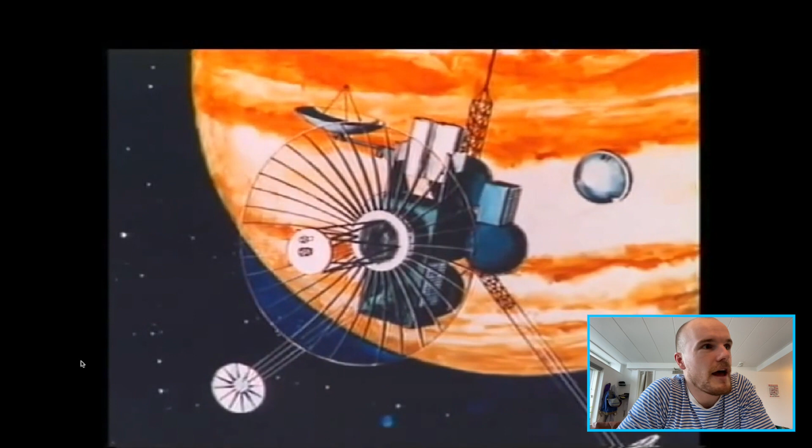So yeah, this is the Galileo space probe, and it's an artist's rendition of what the mission looked like. So this was basically a spacecraft that they sent to Jupiter, and then from the main spacecraft they dropped this thing, which is an atmospheric probe. And what you can see happening here is the probe entering the atmosphere at 47 kilometers a second. And it gets really, really hot, as you can probably imagine. And just how hot it gets is really the question. That's really the subject of my PhD.

So you can see here, this is after it's gone through the high heating entry phase. It drops that parachute and then drifts through the atmosphere, and then this thing collects heaps of data about the atmosphere, what's the composition of the stuff there, how fast is the wind going, what's the temperature, and then it sends this stuff back up to the main spacecraft, which is still in orbit, and then that spacecraft sends it all the way back to Earth. And that's the point. That's the whole idea, is to get data about what's going on under the surface.

Yeah, I like this video because it's just a really cool art style as well. You don't see this much anymore. It's usually just really complicated computer simulations, whereas back in the day, you'd get a lot of really cool hand-drawn aerospace engineering stuff, and it's often a lot better.

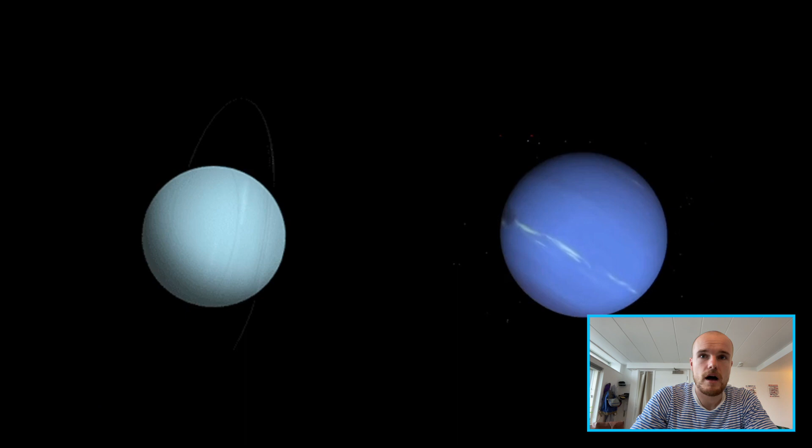So, I am working on something pretty similar, but for the ice giants, and the ice giants are Uranus and Neptune, these two guys. And so the presentation is kind of technical, but it's not too technical. If you're interested in what I'm actually doing, then it's worth listening to, I suppose. So I'll be talking about the specific stuff that I'm doing, in terms of what things we are actually hoping to get out of the tunnel, and the engineering that I'm doing right now.

Presentation structure, who cares? It's lame. You'll work it out. So motivation and background is an engineering term for: what is the point of this whole presentation? Why should we be interested in what you're doing? And it's usually directed at people who fund you.

But it's worthwhile stuff. So the mission is to send a spacecraft to the outer gas planets, like I was talking about, and this is an example of what the spacecraft might look like. Heat shield, and then this is the actual payload, as it's called. This is the science that they're delivering. And they're potentially wanting to do this in the early 2030s, because that would be a time when all the planets align in a nice way that you can kind of hit them both at once.

So T6, the name of the tunnel I work on, the T6 Stalker tunnel, named after a famous hypersonics researcher, Ray Stalker, is the only facility, and facility is a word for wind tunnel, in Europe that's capable of going fast enough. So I mentioned that for Jupiter it's about 47 kilometers a second, but for these ice giants it'll be about 20 kilometers per second. So T6 is the fastest one. It's the only one that can do it in Europe.

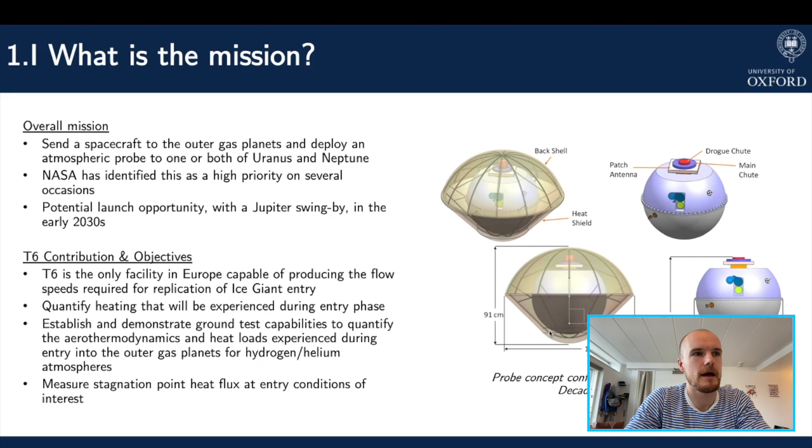And what we're hoping to measure is the stagnation point heat flux, which basically means the heat transfer into the vehicle. How hot does it get? And if we know that, then we can design the vehicle. So that's what the mission is.

Why would you want to do this? This is a good question. A lot of people ask me this. So why would you want to go? It would cost about $2 billion to do this mission and send a spacecraft out into the outer solar system.

And I think, if anyone knows my neighbor Marie, she always asks me these questions like, why would you do that? Why would you spend $2 billion sending a piece of metal out into space to just look at these kind of balls of gas?

Well, other than the fact that it's never been done before, planetary scientists think that Neptune and Uranus are really similar to a lot of extrasolar planets. So these are worlds that orbit around other stars than the sun. And they think that by understanding the structure of these two planets, they might be able to infer information about these extrasolar planets, and that would give them information about a lot of extrasolar planets.

They have a lot of unusual properties. The magnetosphere is unusual. Another one, kind of like the elevator pitch one, is that there might actually be life on the moons of these planets. So it's not uncommon for the tidal forces of gravity to heat up the cores of these tiny little moons.

So it's a tiny moon next to a really big planet, and tidal forces, which is basically the giant planet pulling, so the moon pulls the tide up on the Earth a couple of meters, and the moon's just a tiny little moon, but imagine you've got a massive planet like Neptune pulling on a tiny, tiny little moon, so it will squish like this,

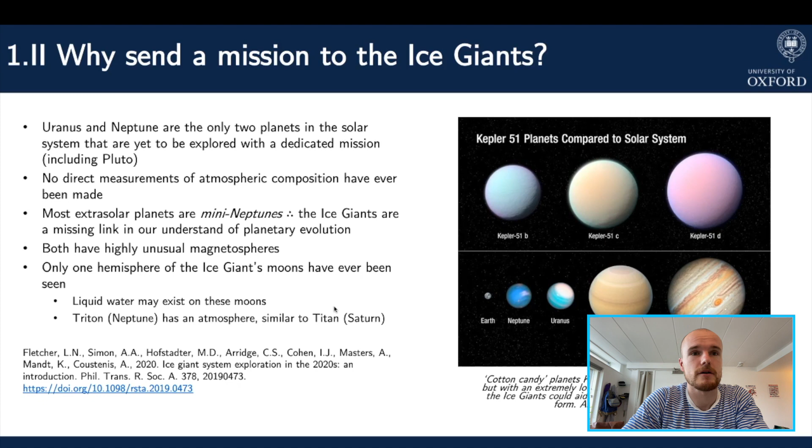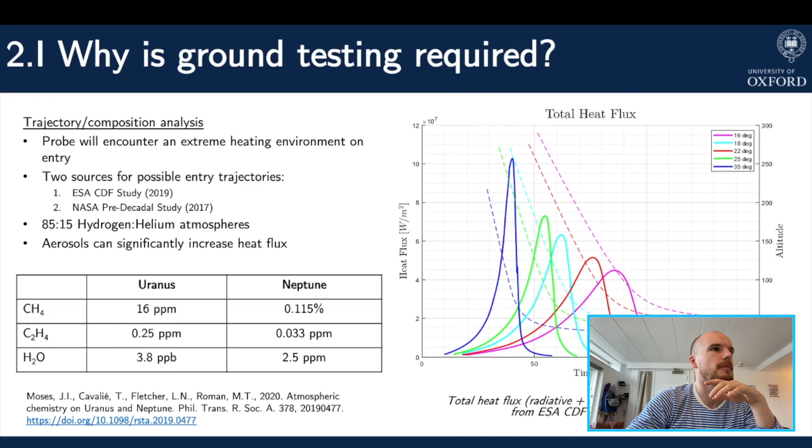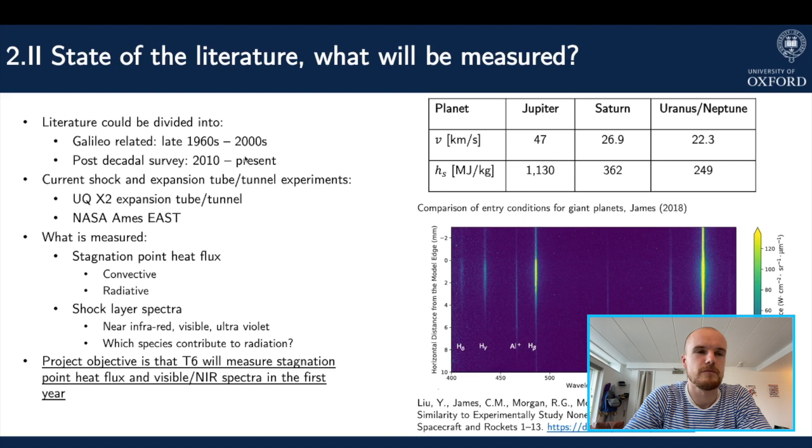They do experiments on this kind of thing at the University of Queensland, so shout out if you're from Queensland, and at NASA Ames in California. So they're the two main places where they do experiments similar to what we are doing, or planning to. Planned upgrades and tests. This is what I'm actually working on.

So I'm designing a lot of stuff. I'm actually not doing that many tests at the moment. We need to make a lot of upgrades to the tunnel T6 in order to get it to do these tests that we want it to do, because 22 kilometers a second is extremely fast, even for T6.

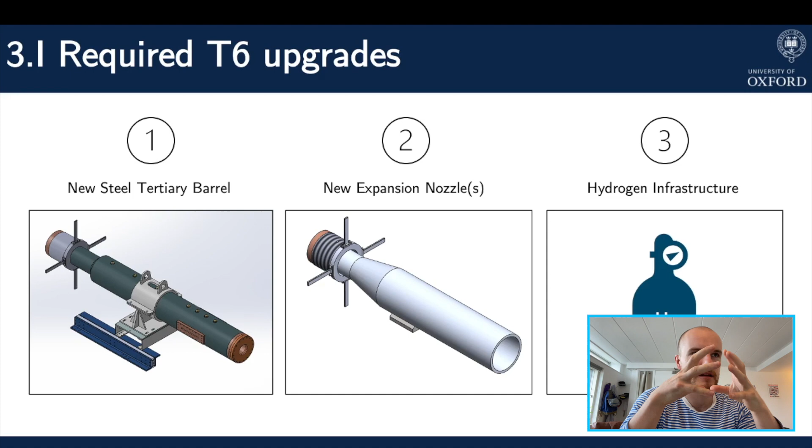So I'm building something called a new tertiary barrel, an expansion nozzle, and all of the hydrogen infrastructure. So we're testing using hydrogen and helium because that's what's in the atmosphere of these planets, and hydrogen is highly explosive, so we need a way to safely do that, and that's what I'm thinking about.

So this is a good little image of T6, just context. I'll try and do a really quick job of explaining how it works, although if any of my supervisors are watching, they'll probably be here to correct me. But essentially it consists of three parts, well, four. There's the free piston driver.

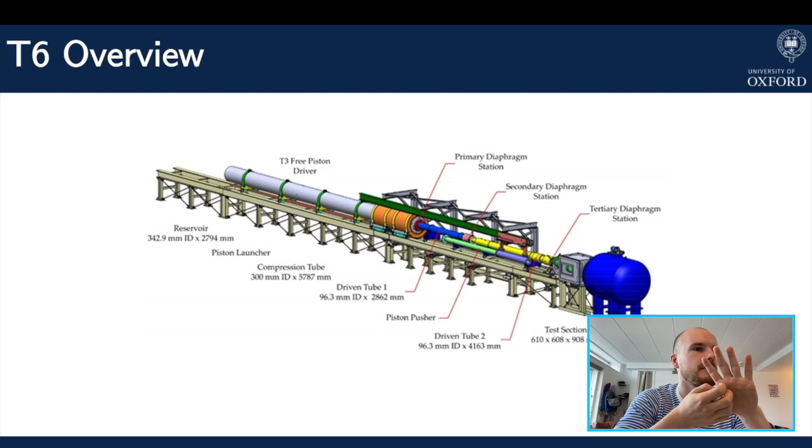So there's a piston at the back, which is just a big heavy piece of metal, and behind that you'd pressurize that with a really high pressure gas up to several atmospheres of pressure. And then in front of that piston you'd fill it with an inert gas like helium, and then when you fire the piston it will compress the helium up to a very, very high pressure.

And the highest pressure that we work with at the moment is 46 megapascals, so 1 atmosphere is 100 kilopascals. So what's that? About 40 times atmospheric pressure? I might have got that wrong. It's a lot. So it's so high, in fact, that it bursts a steel diaphragm at this primary diaphragm station.

So the steel diaphragm is just a thin piece of metal. And then there's really high pressure gas, and it bursts this diaphragm, and then this really high pressure gas sends a shock wave into the test gas. So the test gas is a mixture of hydrogen and helium, and it would sit in this tube here. So this gas gets shocked, and then that bursts a secondary diaphragm, and in this next tube that's full of really, really low pressure air.

So what basically happens is the test gas gets heated up massively, and if you heat something up a lot and then expand it, so it's at really high pressure and it goes into this really low pressure tube, you massively increase the stagnation pressure and stagnation enthalpy, essentially. So you increase the velocity and you massively increase the overall energy.

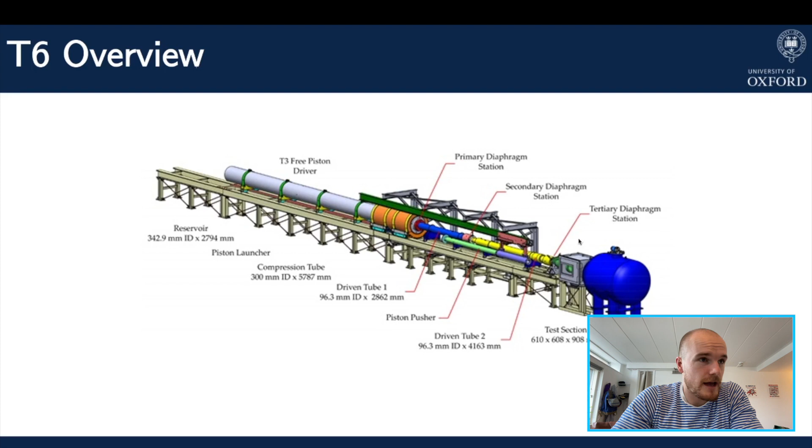Then we get something that might be close to what happens to the spaceship, and then we can shoot it through down to the test section here, and that's where you put a model, so the model of our spacecraft. So this is what it looks like, and I'm working on stuff that goes down in this final end here.

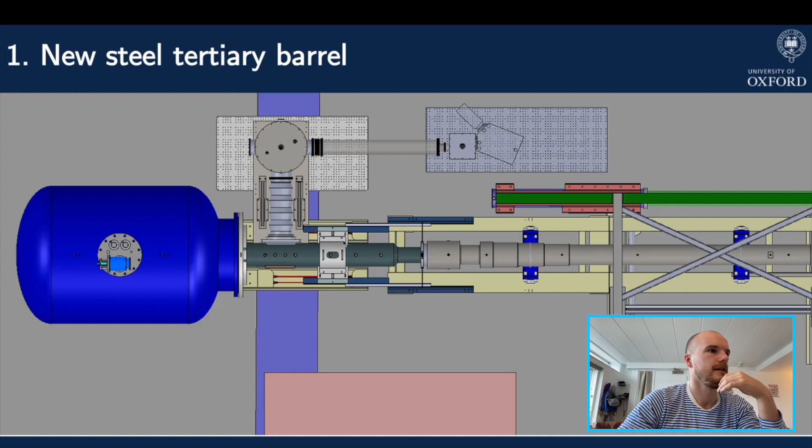So here's the downstream end. This is where the shock comes from, like that. And then I'm looking at this steel tertiary barrel. So that's what it would look like, and it kind of sits there. It's all a bit technical, but what you find is when you increase the speed more and more, the heat transfer into the spacecraft starts to come more from the process of radiation rather than convection.

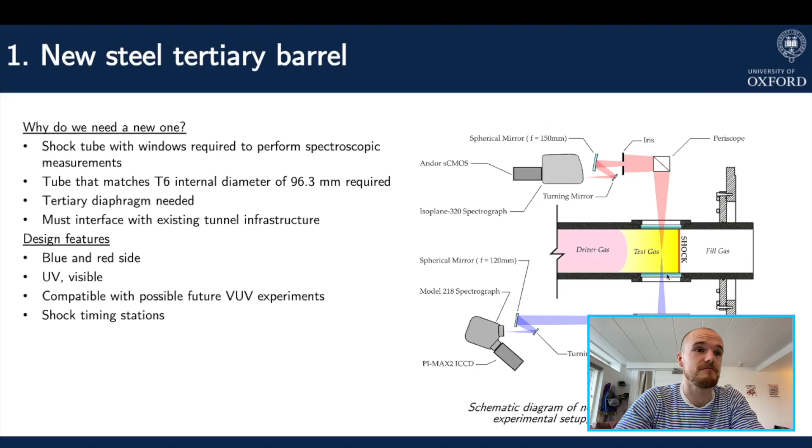And the way to measure radiation is using these spectrometers. So the purpose of designing the barrel is to put windows in it. Radiation is essentially light, or electromagnetic radiation. It's the same thing as visible light, but it might be in the infrared or the UV spectrum. And to measure those things, you need these spectrometers, and they need to be able to see in. So the purpose of designing this thing is basically to have windows in there so you can see.

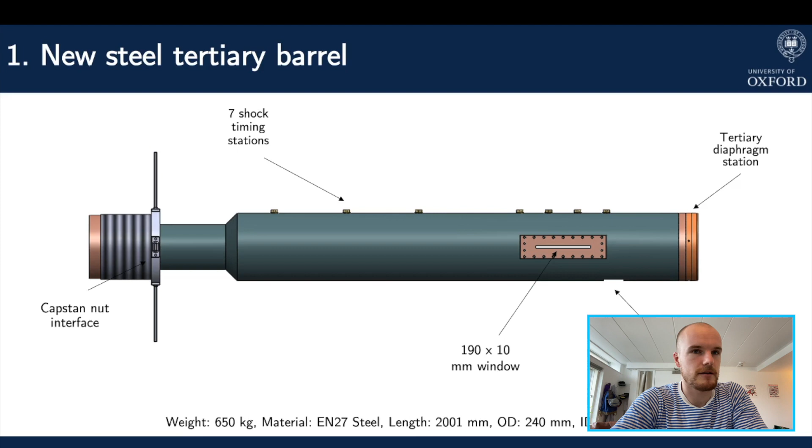And this is what it would look like. So it weighs about 650 kilos and it's about 2 meters long. And the key feature is this window here, 190 by 10 millimeters. If you looked in there as the shock passed through during a test, all you'd see would be a really quick flash. But the spectrometers can take whatever radiation data there is, and then we can work out how hot it might get, essentially. So I'm thinking about this barrel a lot.

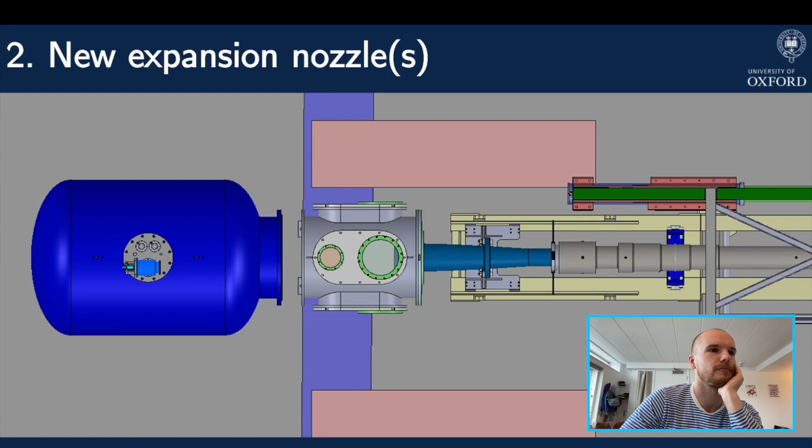Another thing I'm working on is this expansion nozzle. So we're looking at exactly the same thing. This is the dump tank, the end bit, and this is the test section where we might put a model, and here's our expansion nozzle. Everything upstream is pretty much the same. So this is where the shot comes from, right to left, and goes through this expansion nozzle.

So the whole point of doing this is the internal diameter, so the bit upstream in the tunnel where the shot goes through is really, really tiny. Well, when I say tiny, I mean it's 96 millimeters, 96.3 millimeters in diameter. So you can't really put a very big model in there, essentially. So probably the largest size model you could put in would be 40 millimeters across.

And you imagine the whole point of having a model in there is so you could put some instrumentation in and measure stuff, but you can't really do that if the size of your probe is 5 millimeters, then it's not going to fit. So the point of the expansion nozzle is to take that core flow of 96 millimeters and expand it out to a large diameter so that it can be used.

Now, there are some drawbacks associated with that. If you expand it out, then you lose some of the properties that you want, one of which is the density length product, but you can get away with it, so I'm told. So that's the purpose of what I'm doing.

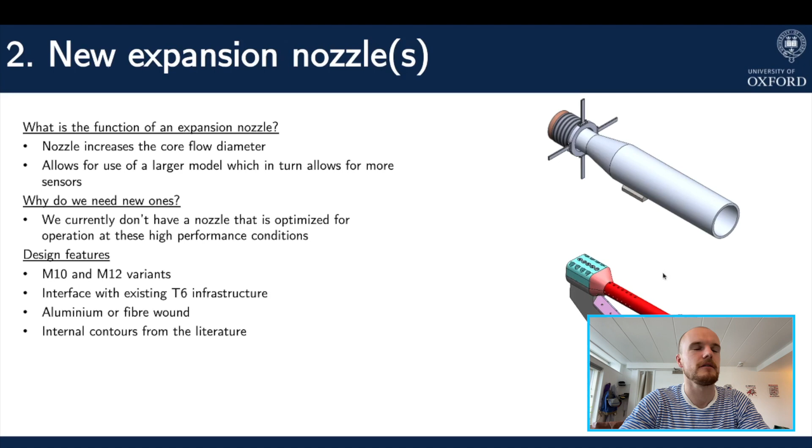Oh yeah, and this is what the model might look like. You have to put these models for these kinds of facilities on really big, bulky, this is called a sting. This is like the model mounting arm. It has to be super bulky because of the forces involved in putting one of these things in a tunnel. Yes, this is what it would look like.

The really interesting part is this internal nozzle, internal profile, and that needs a lot of thought put into it in order to get the right stuff out the end. So this would be about 100 kilos and about 1.5 meters long, and machined probably out of one piece of aluminium, which is pretty sick.

So the thing I'm spending a lot of time thinking about at the moment is, when you go from expanding from a small internal diameter to a large internal diameter, how can you preserve the properties in a uniform way? So really, if we're testing something in a wind tunnel, we'd like to know that the wind we're putting over it is a certain speed and relatively constant, so that we can control it essentially.

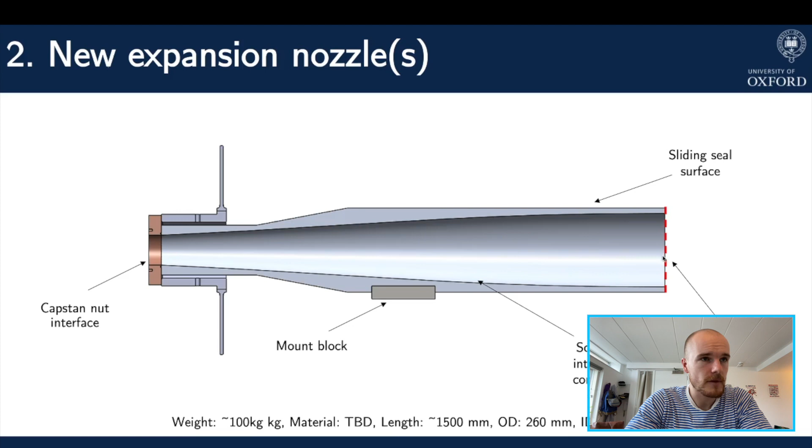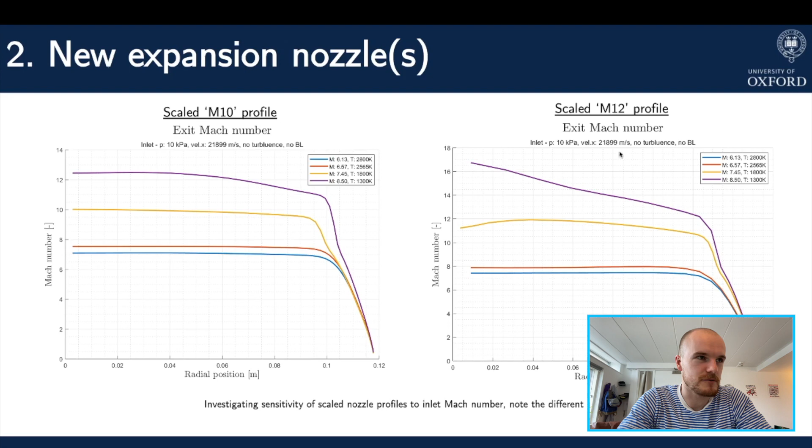And at the outlet plane, so this is where the model would sit maybe, we'd like to know that the properties, like the velocity and the Mach number and as much as possible the pressure, are constant. And so what I'm thinking about is doing computer simulations of some internal nozzle profiles like this that we might want to use.

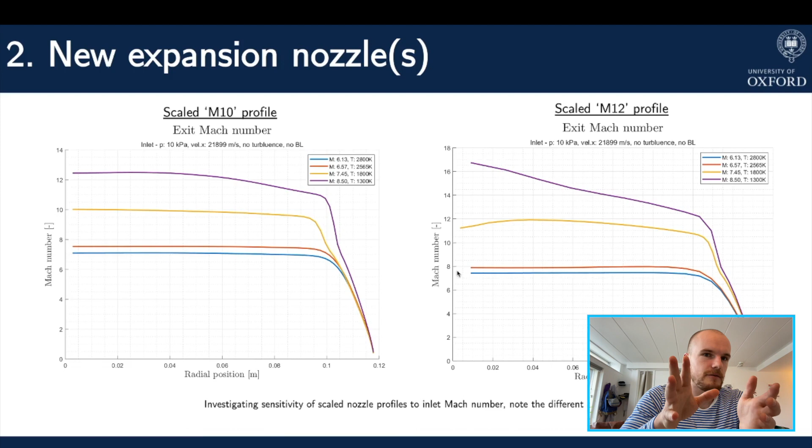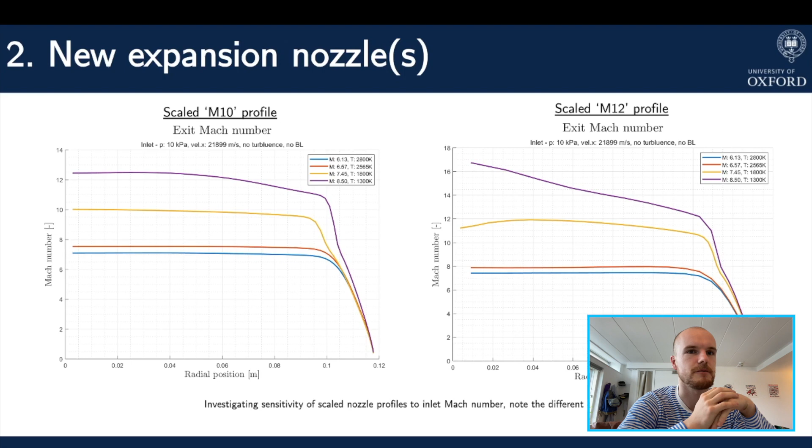And I'm thinking, is it going to be constant if we run it at this speed? Is it going to be constant if we run it at this speed? What if this happens? What if this happens? And we can pick one that works for a range of speeds and conditions that we might want to use. So I'm spending a lot of time thinking about that at the moment.

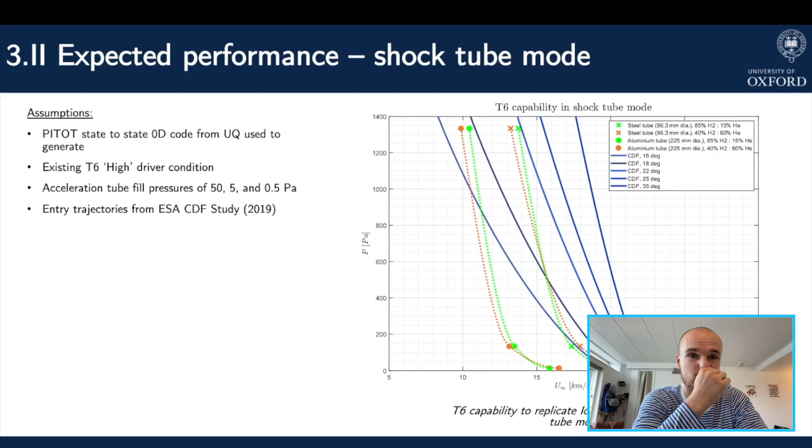This is all technical stuff, but I guess the cool thing is, if you look down here, this is how fast we're going. That's a cool thing to look at. So these are the proposed entry trajectories that we'd like to match, around 20 kilometers per second, which is super fast, but pretty exciting as well. And similar stuff here, I suppose.

So that's really what I'm working on in a nutshell. It's a really brief summary. Things are really going to start moving quickly in the next month or two. All those things I was talking about are going to start getting built, and then we're going to start doing some testing around September. So it's exciting stuff, and hopefully by January of next year, I'll have some experiments done and some cool photos.